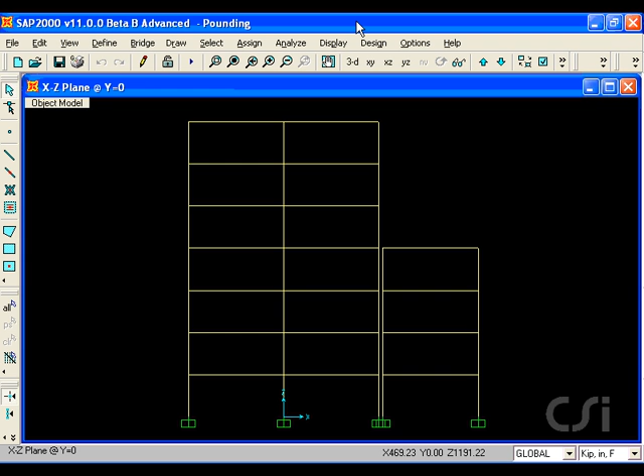This tutorial will show two different ways to utilize the nonlinear gap element in SAP 2000. First, we will show how to perform a building pounding study. Here we have a 7-story building adjacent to a 4-story building. Although the column lines are separated by a 16-inch space, we are going to assume that the physical gap between the buildings is only 1/4 inch.

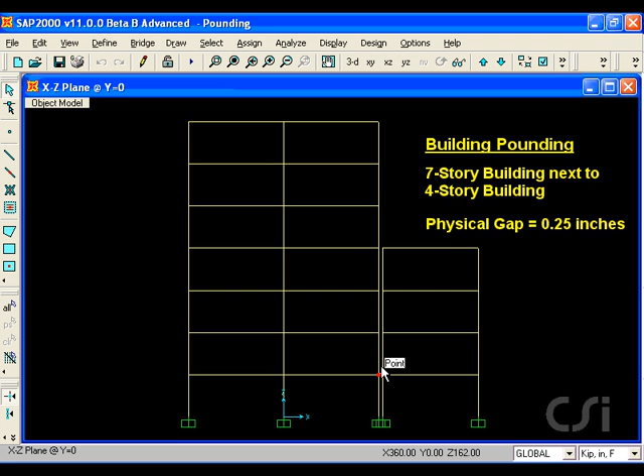We will subject the buildings to an earthquake ground motion and use the nonlinear link elements to model the gap. We start by defining the gap element, which is done under the Define Link Support Properties command. Here, we will add a new property of type gap, which we will call gap.

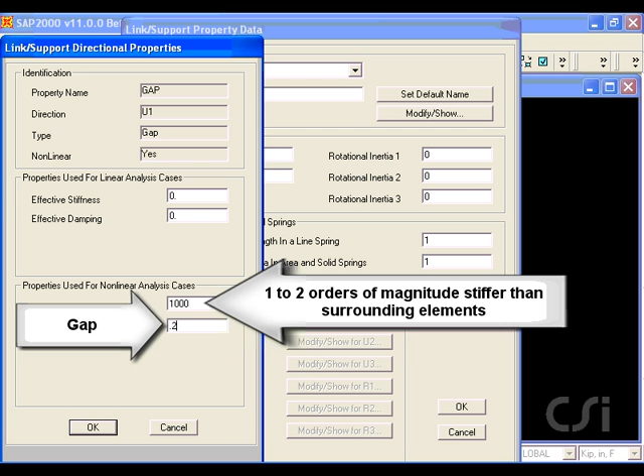It will have properties in only the local U1 direction, which is along its axis. It will be a nonlinear element, and if we click on the Modify button, we can specify its nonlinear stiffness and the starting gap or opening of 0.25 inches. We want the gap element to be stiffer than surrounding objects, but not too stiff.

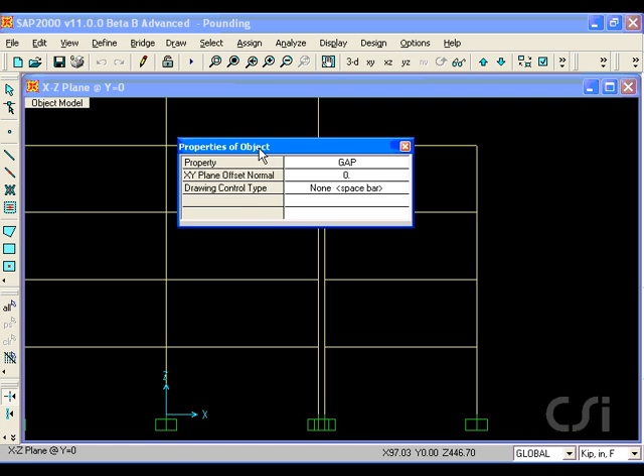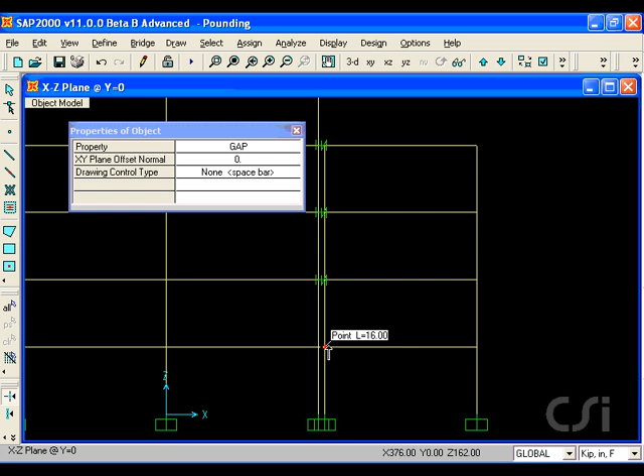Next, we will window in between the two buildings so that it will be easier to draw the gap elements. Go to the Draw Two Joint Link command and make sure that the property of gap is selected. Draw the gap elements across the opening between the buildings at each floor level. Click on the Select button to leave the drawing mode.

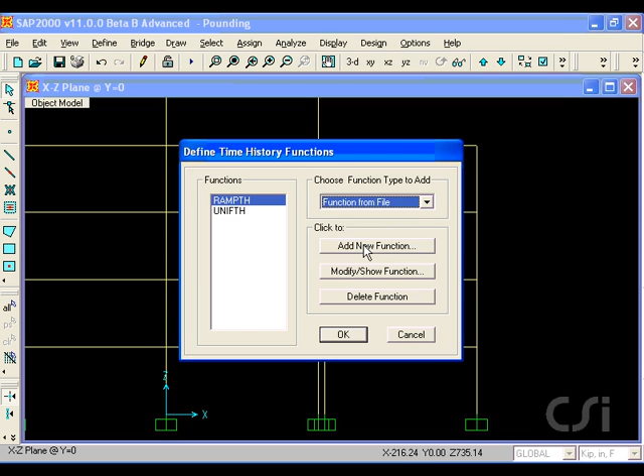Next, we will define the time history input. We will use a function from a file, in this case an El Centro earthquake. This particular file is in a time and function value form, with 3 data pairs per line.

Now we will define our analysis cases. In addition to the default dead load case, we will add a modal case with Ritz vectors. We will ask for a total of 30 modes. We need at least 15 for the 7-story building, the 4-story building, and the 4 links, but we'll ask for 30 to be safe.

For Ritz modes, we need to define the starting load vectors. In this case, we will use acceleration in the x direction and the built-in deformation load for the links.

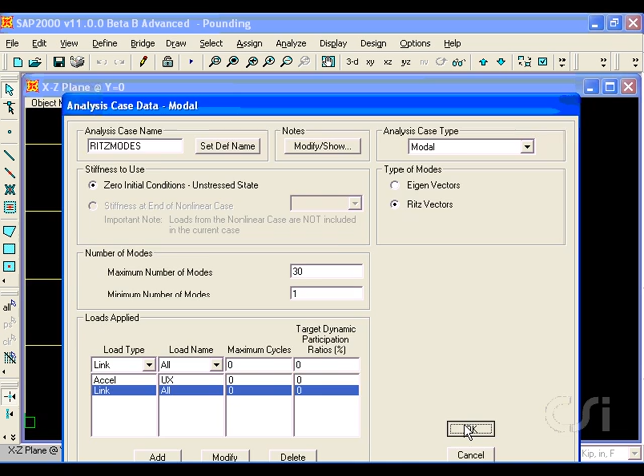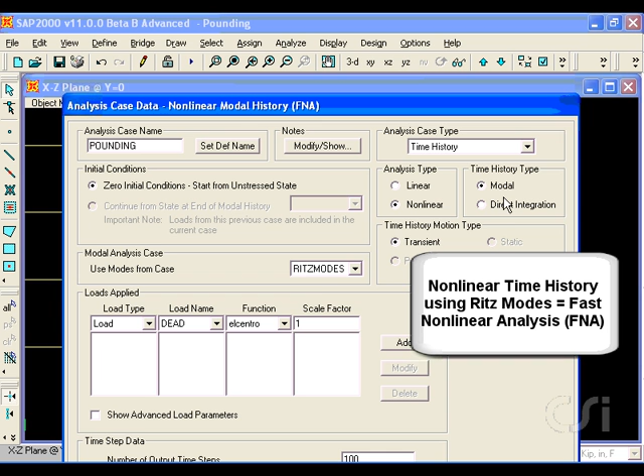We also need to add an analysis case for the nonlinear time history, which we will call pounding. It will be nonlinear using Ritz modes. The loading will be the El Centro acceleration record, scaled from G units to inch units.

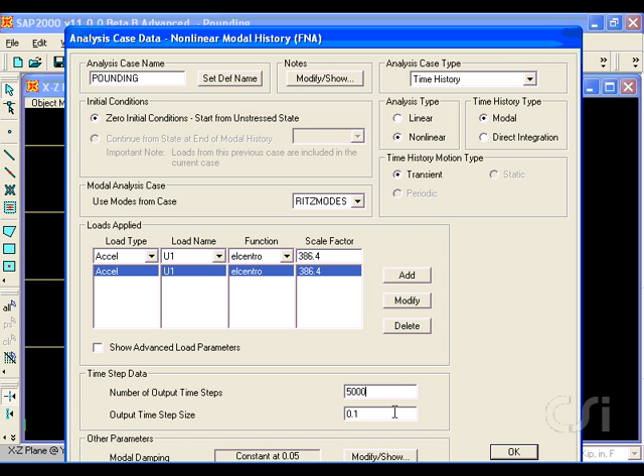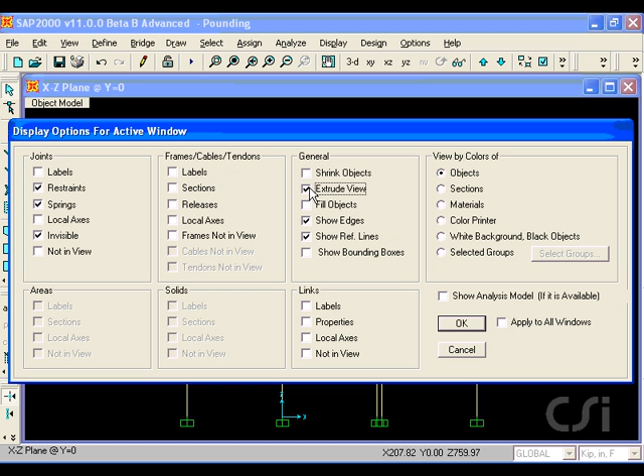We will use 5,000 time steps at a step of 0.002 seconds for a total of 10 seconds. And we will leave the modal damping constant at 0.05. Before we run the analysis, we will change the display so that we may see the model behavior slightly better. We will turn on the extrude view option and remove the links from the display. We will now start the analysis.

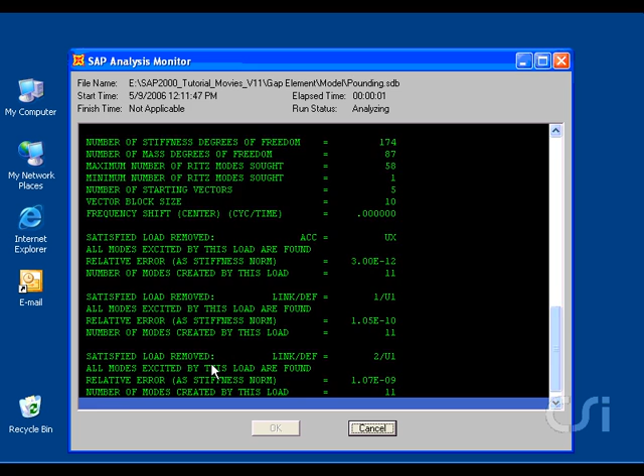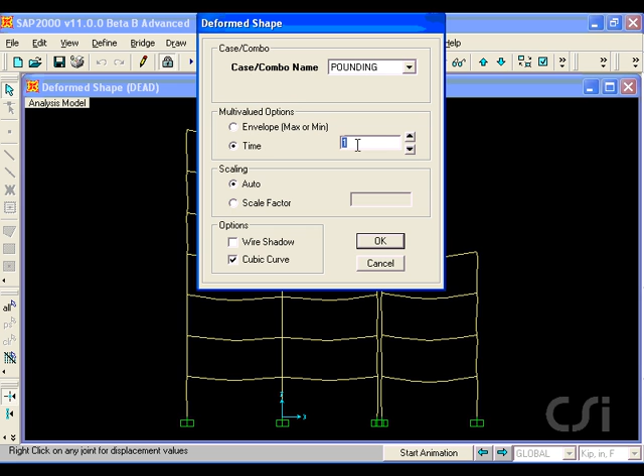First, we will display the deformed shape for the pounding analysis case at a time of 5 seconds. We can clearly see how the buildings have separated. Next, we are going to create a plot of the input ground acceleration. We will save this plot as a named set, ground.

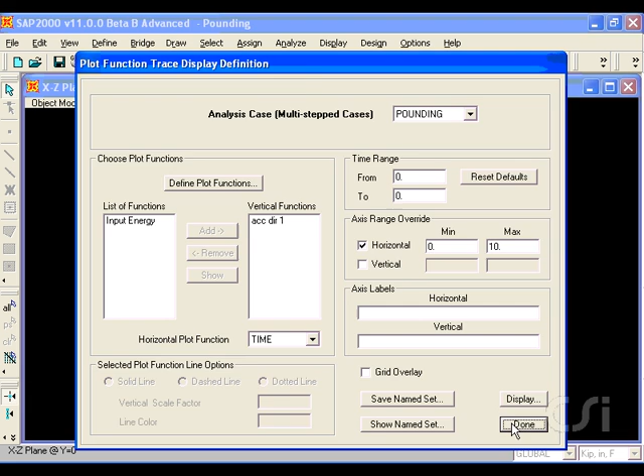The best way to see the pounding behavior is to create a video of the time history response. We will create the video using the pounding analysis case for a time span of 10 seconds. We will also ask that the previously defined ground motion graph, ground, be displayed. We will set the magnification factor to 50 so that the deformations appear larger and easier to see. Let's see that one more time.

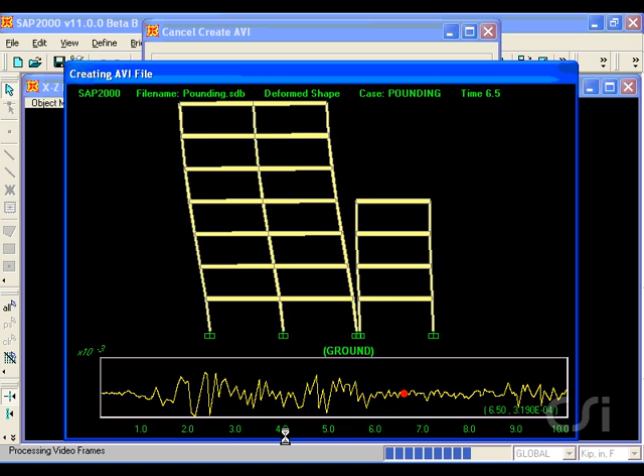This concludes this first example.

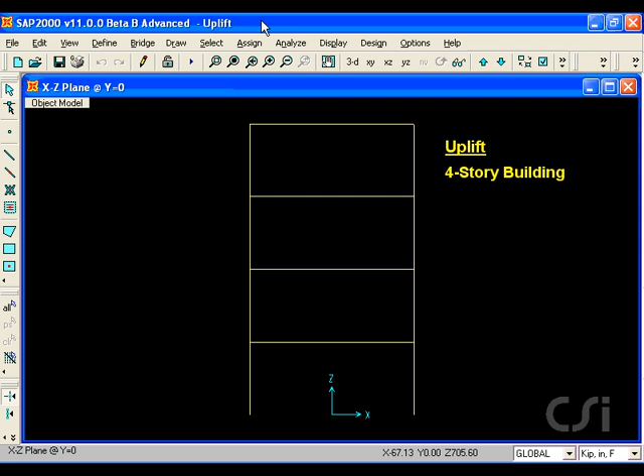For the next example, we will illustrate how to use the nonlinear gap elements to model uplift in columns. We will use the same 4-story, 1-bay building from the first example, subjected to the same earthquake ground motion. We will use the nonlinear link elements to model uplift in the vertical direction.

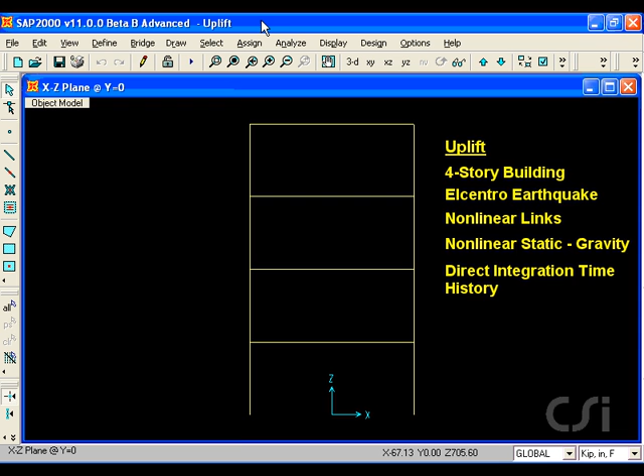However, rather than using Ritz modes with the fast nonlinear analysis time history option, we will use a static nonlinear analysis to apply the gravity loads followed by a direct integration nonlinear time history analysis for the earthquake. Again, we start by defining the nonlinear link elements. We will modify the previously defined gap element.

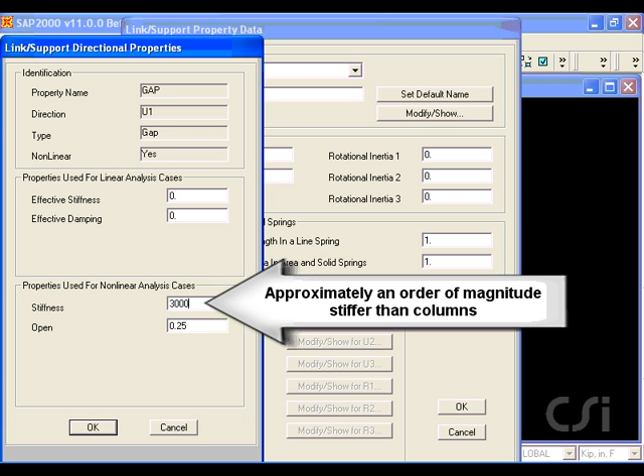We will modify the U1 nonlinear properties by changing the stiffness. We'll use 3,000 due to the larger axial stiffness of the columns, and we will switch the open variable to 0, as the gap should start in the closed position.

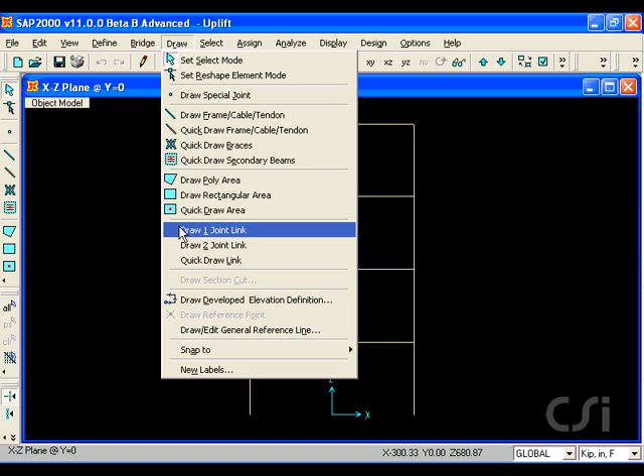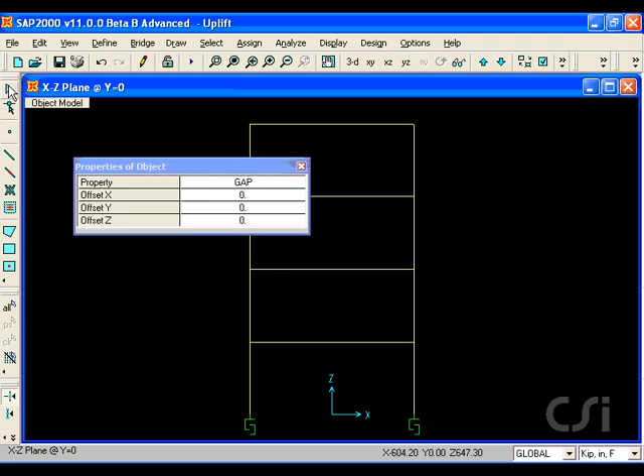Next, we will draw the links using a one-joint link. Make sure that the gap property is selected. When drawing a one-joint link, the U1 direction is assumed to be vertical. Next, we will verify that our ground motion is still the El Centro acceleration defined in the first example.

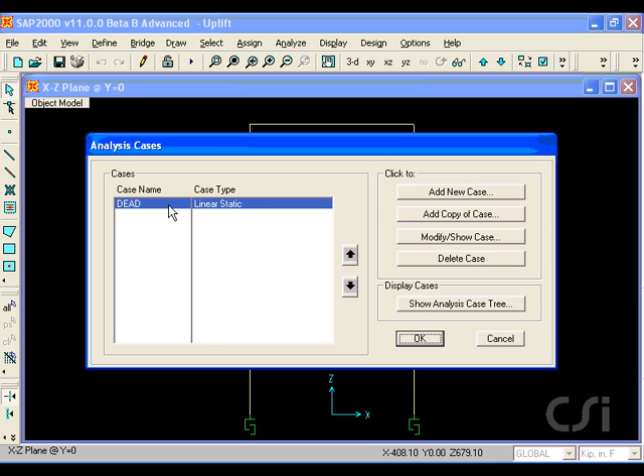Next, we will set up two new analysis cases. The first will be a gravity case, where the dead loads will be applied in a static nonlinear fashion. This is done so that we can apply the dead loads sequentially prior to the uplift analysis.

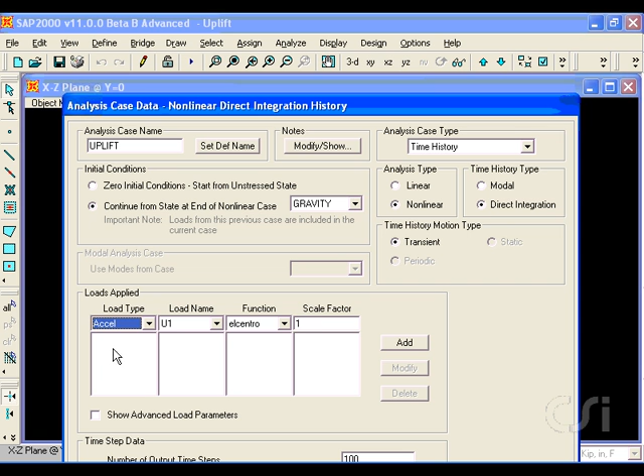The second case we define will be for the time history analysis, which we call uplift. This is a nonlinear case using direct integration. It will start with the initial conditions determined from the gravity case. It will again use the El Centro acceleration record scaled from G to inch units.

We will use 5,000 steps at a 0.002 time step for a total of 10 seconds. The proportional damping will be specified by period. We previously calculated the first period to be 0.98 seconds and the second period to be 0.28 seconds. We will use 5% damping in both modes. Note that the program automatically calculates the mass and stiffness proportional damping coefficients.

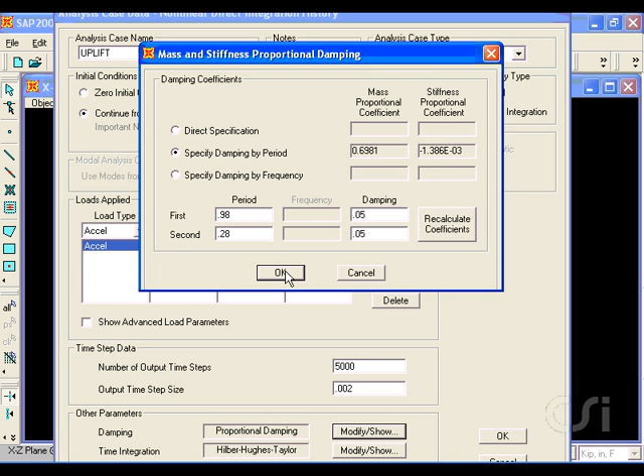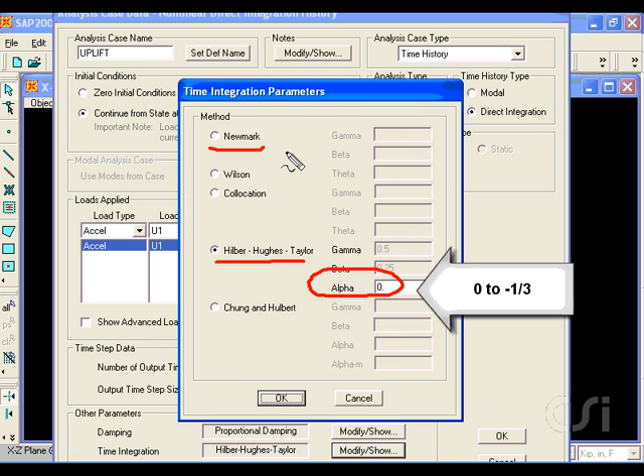For the time integration technique, we will use the default Hilber-Hughes-Taylor method, which is typically the preferred method. Note that when the alpha parameter is set to 0, this method defaults to be the same as the Newmark method. Alpha can range from 0 to -1/3, and we will leave it as 0.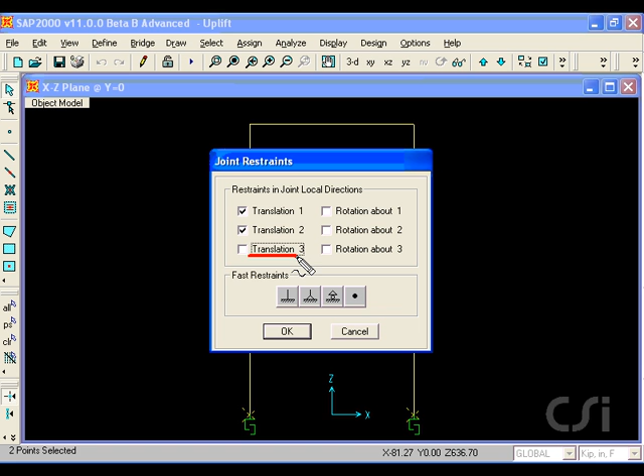The last thing we need to do before running the analysis is to restrain the base of the columns in the X and Y directions. Remember that translation 3 is in the vertical direction, which is where we have placed the gap elements. Now we are ready to run the analysis. We will shut off the dead case, as that has been replaced by the gravity case in our analysis. Note that the direct integration analysis takes significantly longer than the fast nonlinear analysis in the first example.

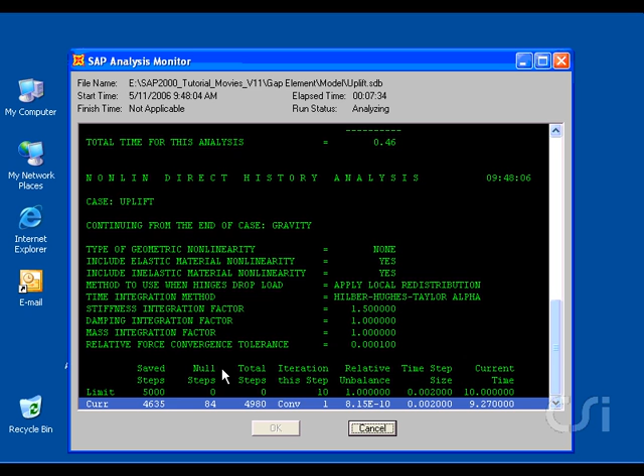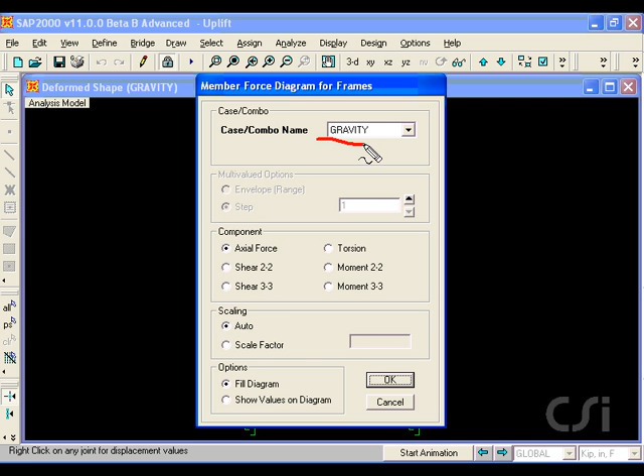Upon completion of the analysis, the gravity deformed shape is displayed. We will also display the axial forces for this case to make sure that the distribution looks appropriate, which it does. As done in the first example, we will now display an extruded view without the links.

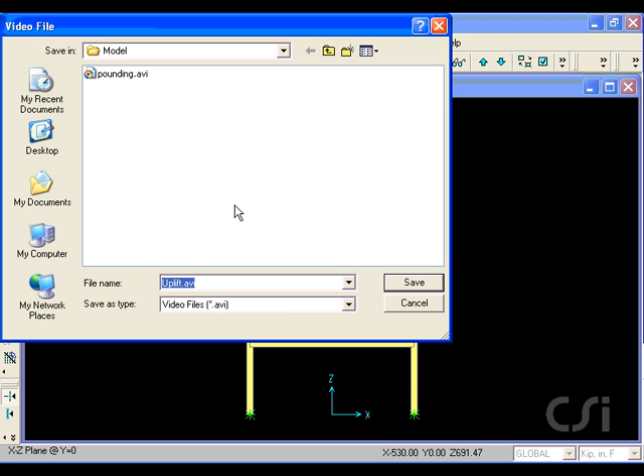As previously stated, creating a movie of the time history response is a quick way to review your model's behavior, a valuable first step to ensure that the response appears appropriate.

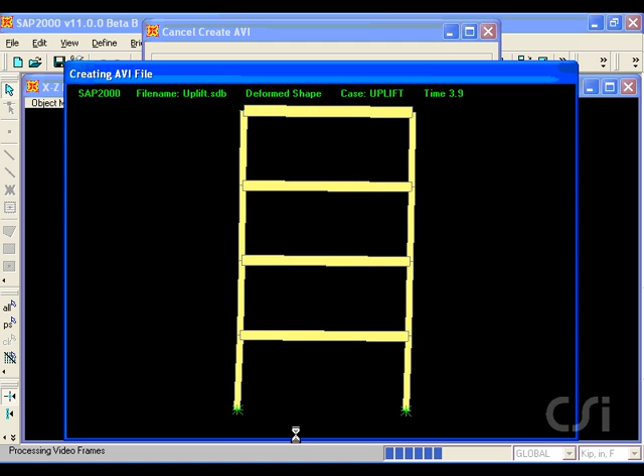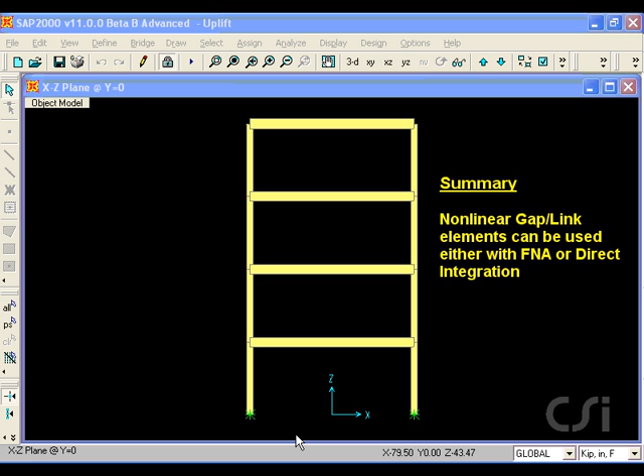In summary, nonlinear gap link elements may be used in either a fast nonlinear analysis or in a direct integration time history, and should typically have a nonlinear stiffness assigned to them, a magnitude or two stiffer than the surrounding elements. This concludes this tutorial.